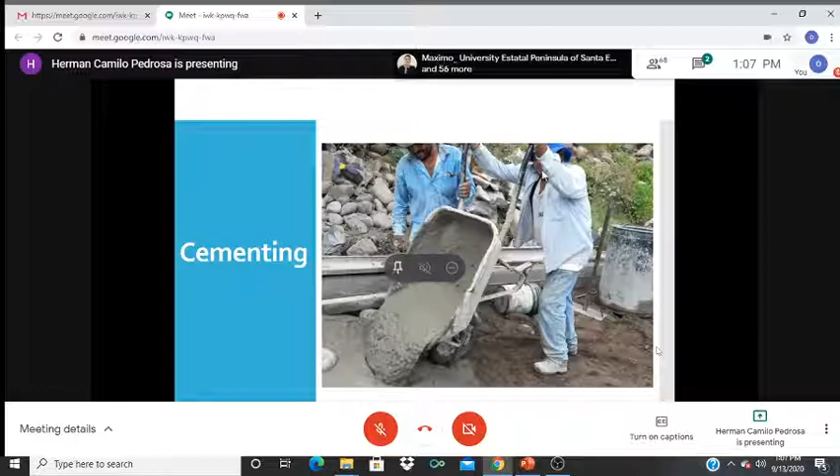But actually, that's not so far from the reality. At the beginning, oil well cementing was pretty much that - it was just a bunch of people mixing cement together and placing it on the well. At the time, the wells were a little bit shallow, so it was possible to do that.

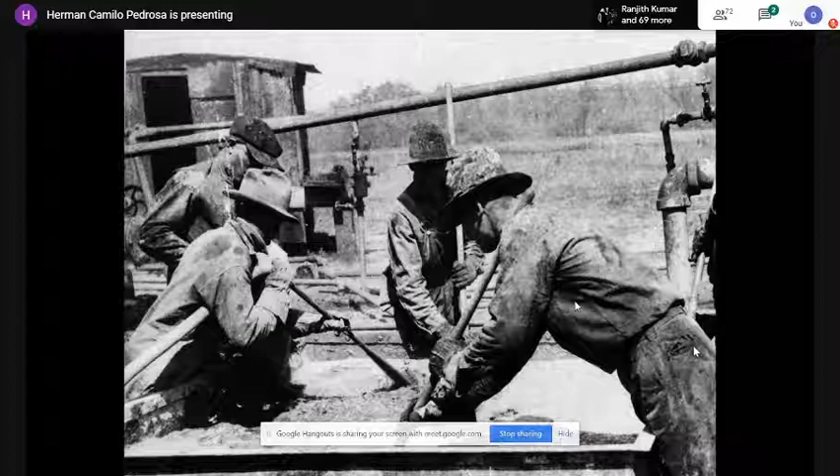But thanks to technology and more security or safety issues, we have been able to evolve a little bit. And now, from this, we only rely on something like this for our well cementing operation. So that it's more technological, automated, and has more benefits for all.

A typical cementing operation looks something like that. This is only for land rigs - offshore rigs are a little bit different, but in theory it's pretty much the same. So we'll have the rig, then we have the bulk cement or the cement silos, the water line or the water containers.

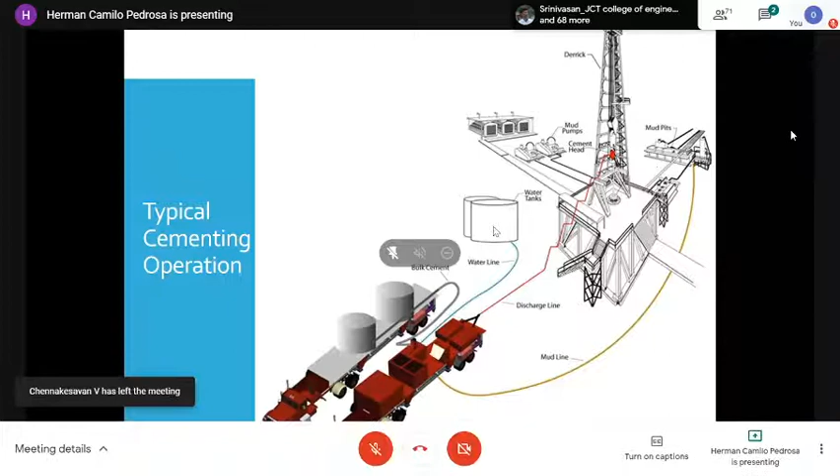These two will be connected into the unit that I showed you in the previous slide. It will be mixed, and then it will be pumped down the drill. So that's pretty much the overall picture of how a cementing operation is done.

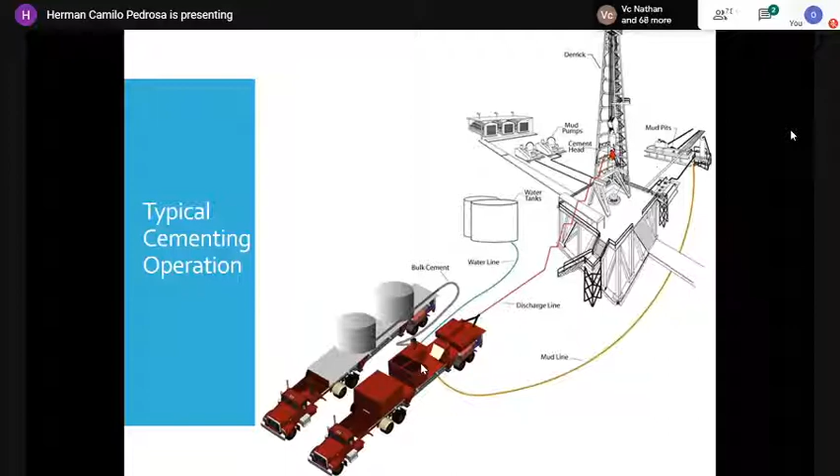But even though it sounds very easy and very simple, it has many things behind that - many things that people should care about before doing that. So in order to do this, the cementing technology and the cementing community has been evolving and creating some standards to make sure that what we do is done in the right way. The first document or procedure launched on the market was in 1937, and from there it started to evolve with many techniques and technologies.

And as I was saying, it's something that's evolving. This year the API standards for stage cementing were launched. That means as new operational procedures, new technologies, and new challenges appear, the industry needs to adapt to them. And in order to adapt in the right way, we need to create some standards.

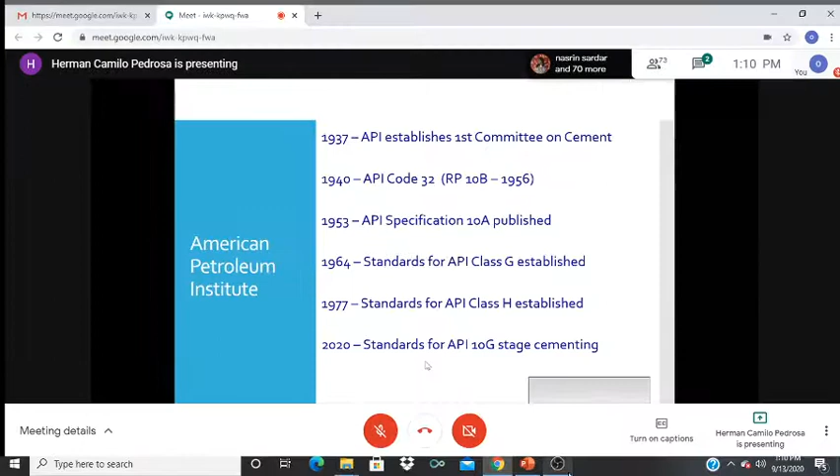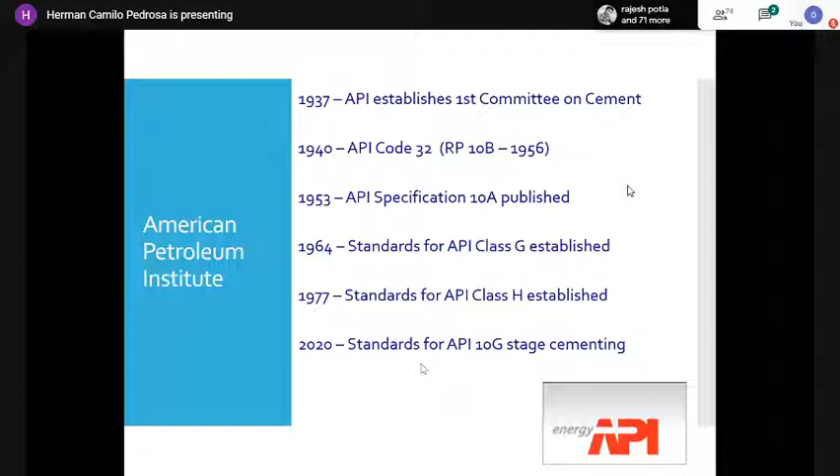That's the reason why new standards keep appearing. In between these years, there have been many more standards, but I just thought these are the most important to show you. So now I want to ask you to put on your mind -

why do you think it's important to cement an oil well?

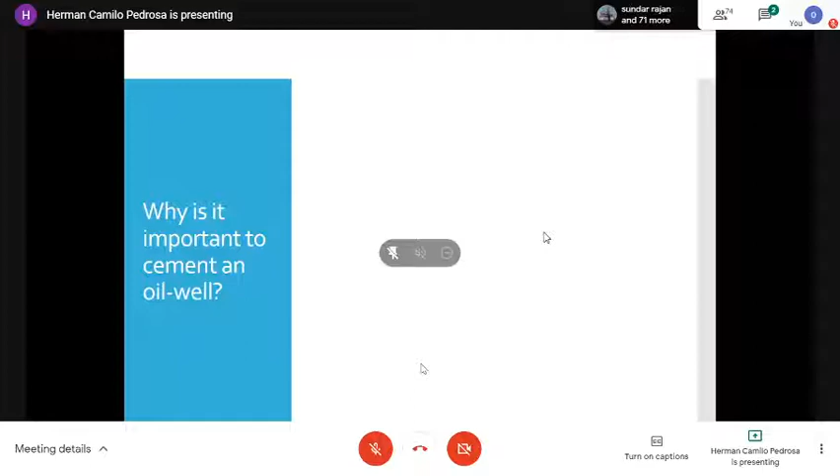There are many answers I might hear, but the main reason or objective is to get good zonal isolation. That's the main point of cementing, so you can avoid communication between zones. If you have a reservoir, it won't communicate with water reservoirs or with the surface. So the main objective of cementing is zonal isolation.

Of course there are other secondary objectives that are very important also, like hydraulic seal, working as casing support, protecting the casing, or abandoning the well. There are many other smaller objectives, but remember the main thing is zonal isolation.

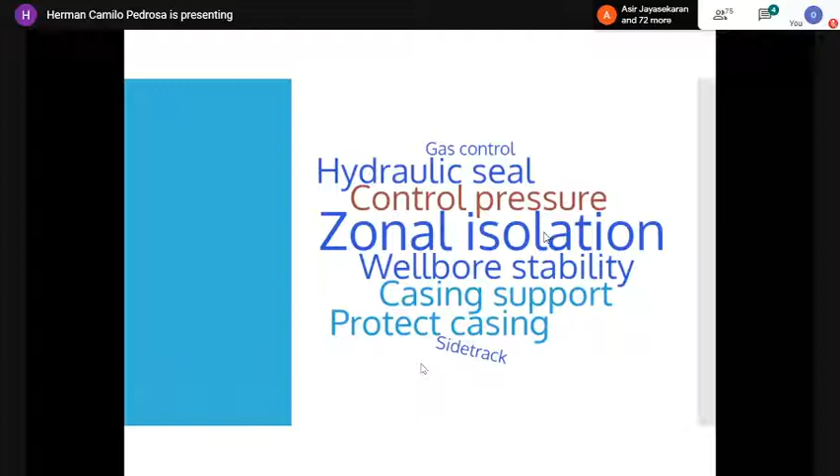The reason for that is because we don't want something like this to happen. This is an active geyser on Yellowstone Park.

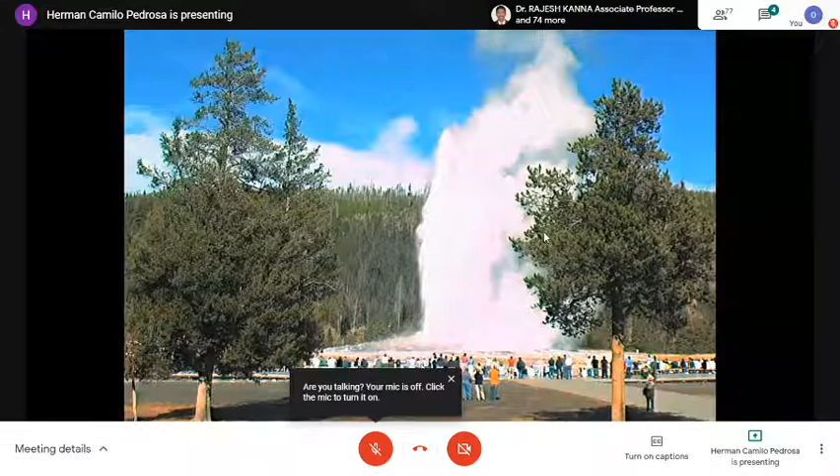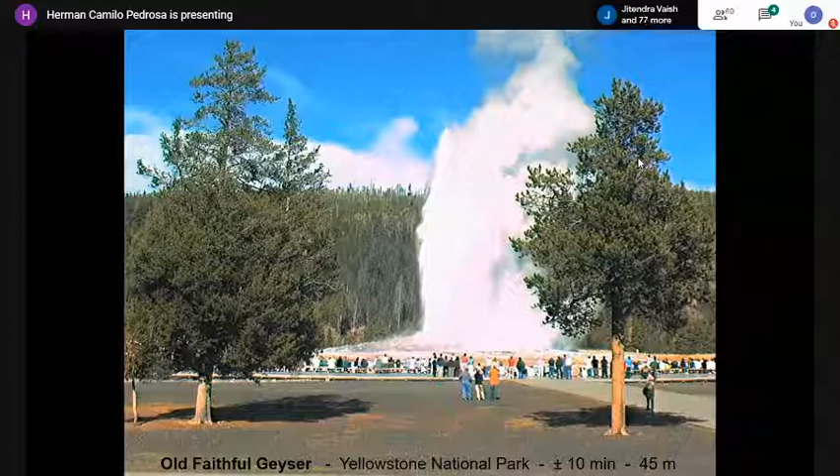There are two types of cementing. One of them is primary cementing, which is the most common type, and it has some important factors or displacement factors in order to improve the quality of the cement.

We need, for example, mud conditioning. We need to use some tools or scratchers to clean the well before or while cementing. We use some spacers and flushes to also clean the well and take out the mud.

It is also recommended to do some pipe movement if possible, like reciprocation and rotation. In some wells it's not possible, but when it is possible, it's recommended to do it.

Another factor that is very important is the flow velocity. It's always recommended to go as fast as you can, pumping the cement as fast as possible, of course without getting into the fracture area.

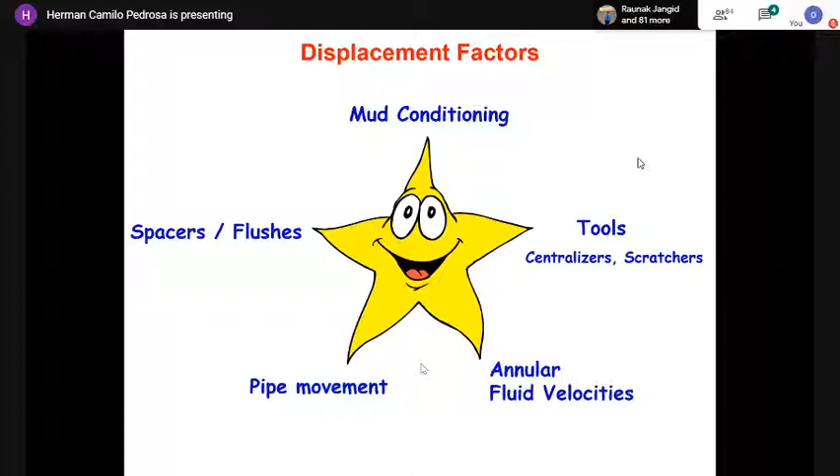Just to show you a schematic of how cementing is done, here we have a well that's full of mud, and we have been conditioning the mud. So what do I mean by conditioning the mud?

In order to clean the well of the mud, we lower some properties of the mud, like the viscosity and the yield point. Why do we need to do that? Because as we're isolating some areas, we need to remove the mud completely. If we don't do that, after it sets, the mud will dry and leave some channels. If we have channels after cementing, we'll have problems because we won't have zonal isolation - anything can flow through those channels and different areas can communicate.

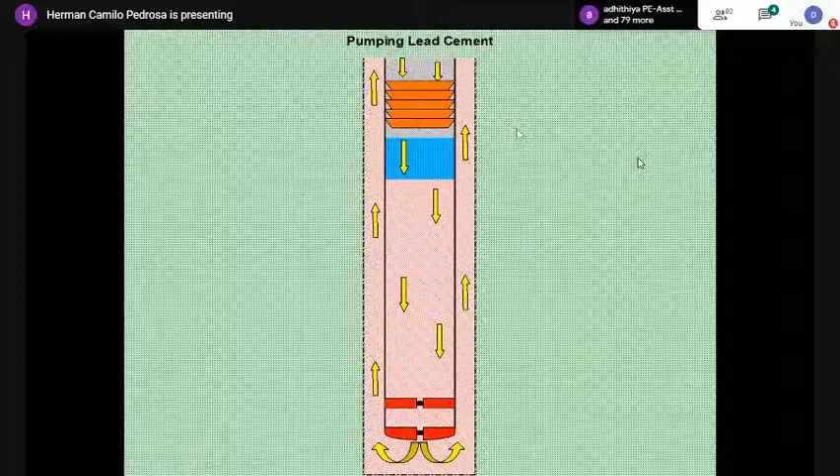So the first part is conditioning the mud. Then we start pumping the spacers and flusher, that's the blue part you can see there. Then we put some plugs - this orange one is called the bottom plug. It's very important for a primary cementing operation to have these two plugs. Actually, pretty much all cementing operations are done this way.

So we start pumping the lead cement, and it will go down, and after that we pump the tail cement. Let me explain a little bit what's the lead cement and what's the tail cement.

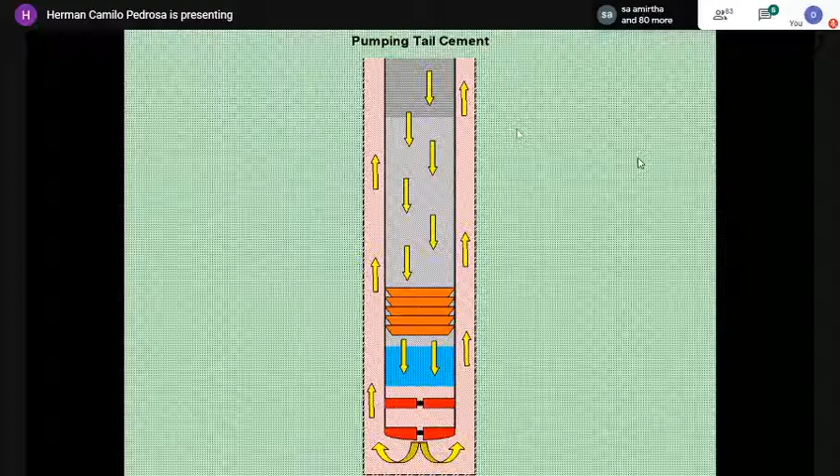The lead cement is a cement slurry with lower density and somehow lower quality. That cement is pumped first because at the end it will be on the upper side. Usually what we do is put the tail cement, which is the most important - that's the cement that has all the properties we need. But in order to fill up the wellbore higher with cement in an economical way, we use a lead cement or secondary cement that will give us some hydraulic seal, but at the same time won't be so expensive.

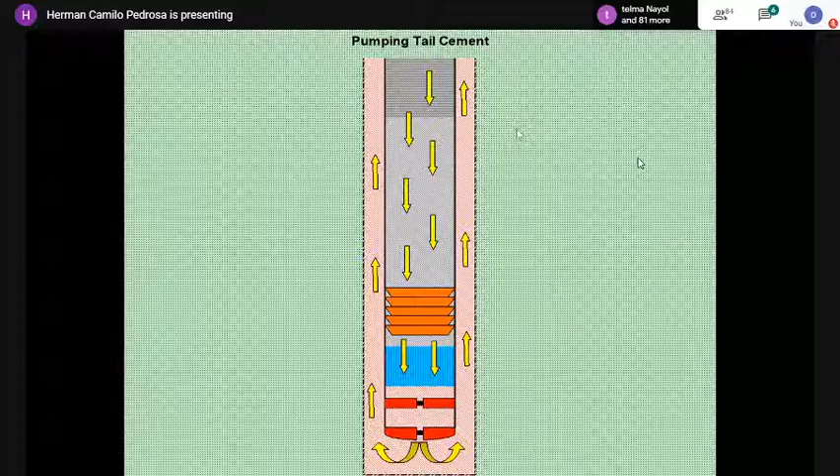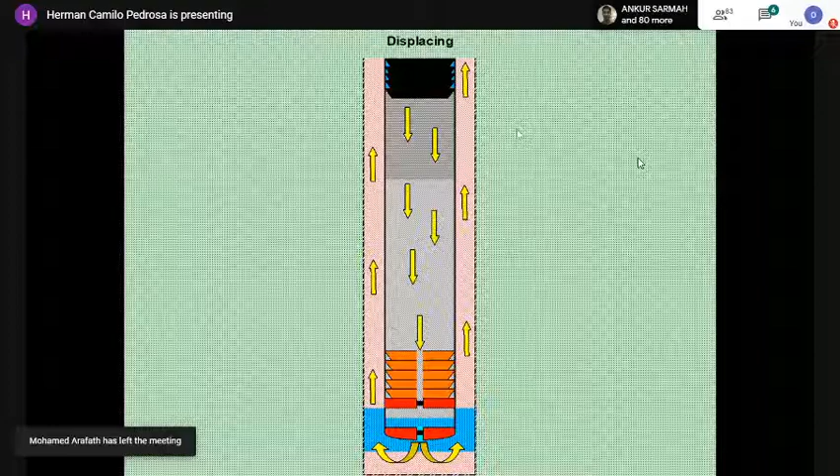So that's the reason of the lead cement. So when that happens, a plug will reach the landing collar, that is this part, and it will break. So once the bottom plug breaks, the cement can start flowing through the annulus.

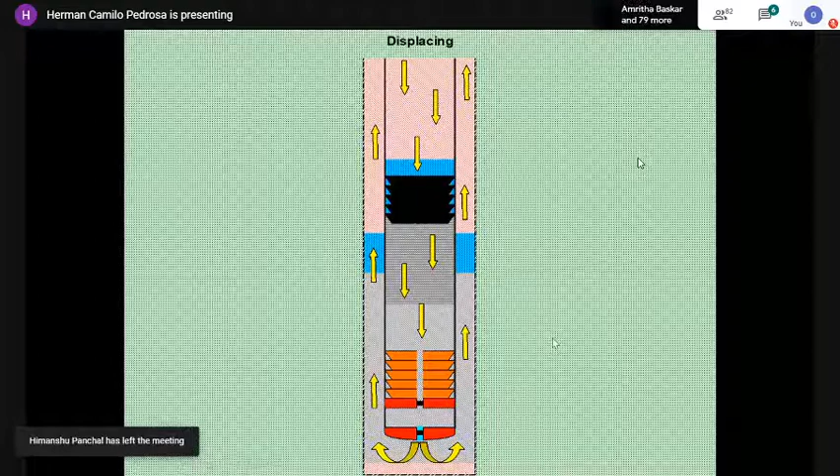It will start flowing through the annulus until this second plug, or called the top plug, reaches the first one. This plug, it won't be possible to break, so you can apply pressure here and it won't break.

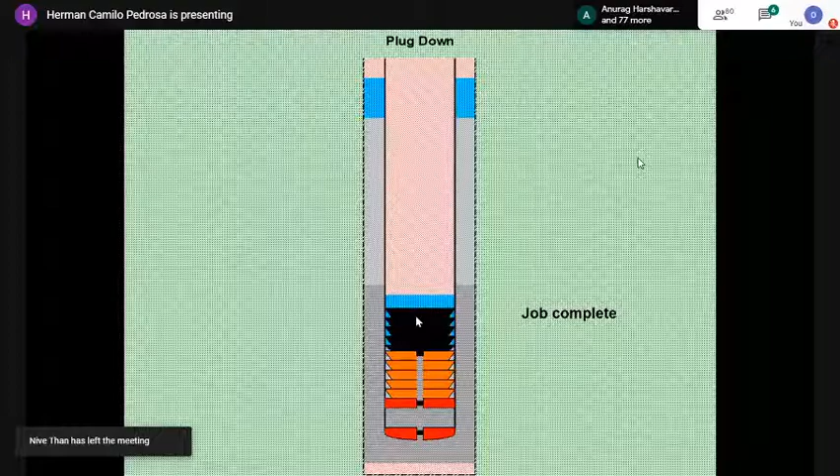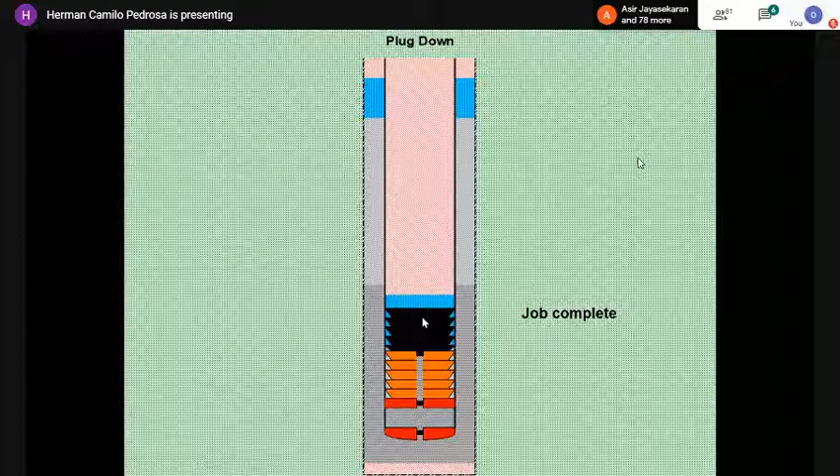In order to do that, we will use a displacement fluid. It can be water, it can be drilling fluid, it depends. And for us to know if the cementing operation was done properly, we apply some pressure here to see if we can build something like some pressure. If we cannot build pressure, that means we still are having some communication.

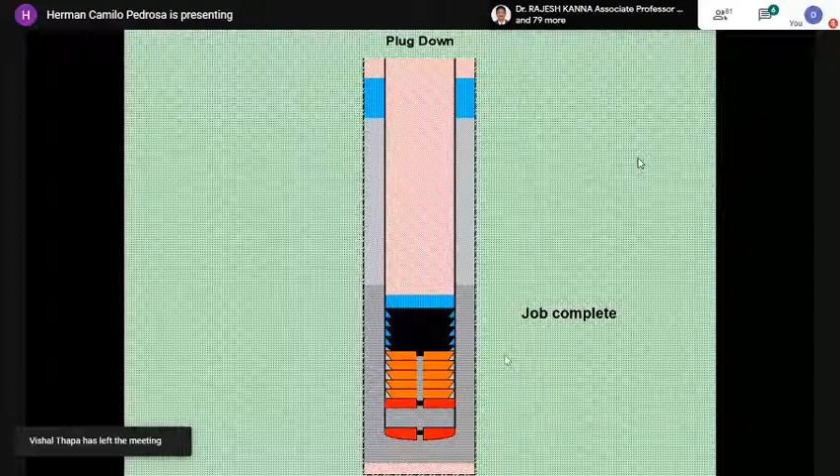So that's somehow like a quick overview of how a cementing operation is done and what happens down the well.

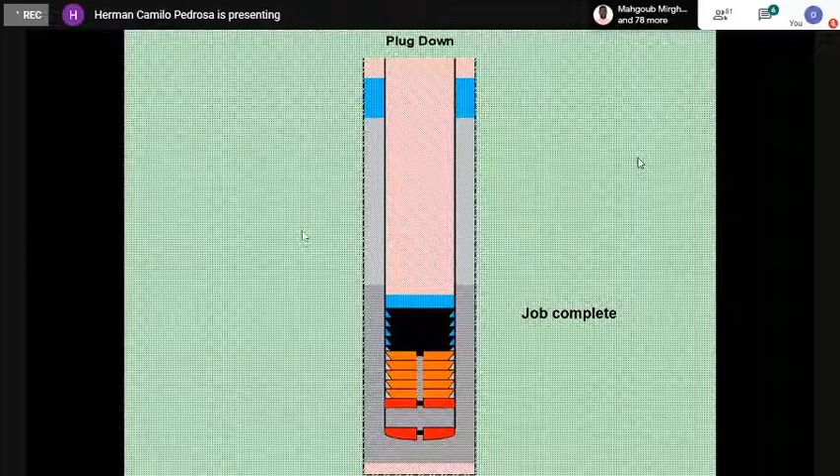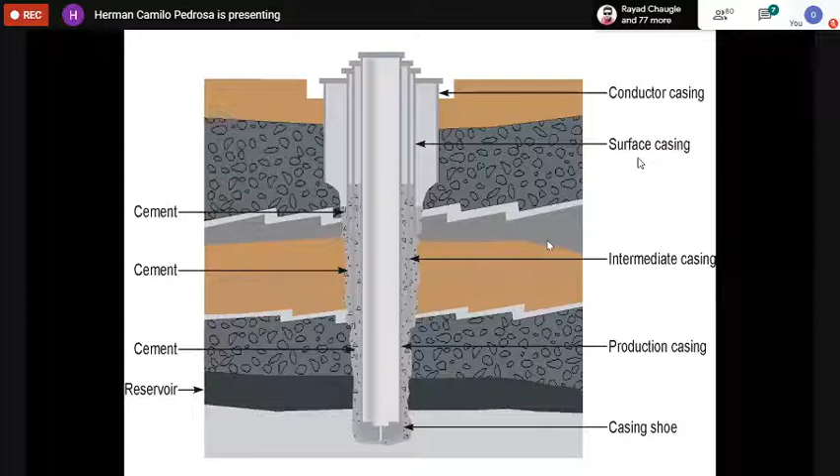As I mentioned, cement is expensive, so usually the wells are not cemented all the way up. So the engineers, the reservoir engineers and the cementing engineers, what they do is they calculate what should be the top of cement, and they cement until that point. It's useless to go above that, it's just like wasting money. Of course, some wells require that, and in those cases it has to be done, but in some others it's not necessary to go all the way up to fill the well with cement.

And the second, so I was talking here about the primary cementing. That's the cementing that will be between casing and formation after you land the casing. And then we have the secondary cementing, also called remedial cementing.

So why is this used for? Usually like to shut off unwanted water or gas, repair primary cementing jobs, abandonment of non-productive wells or abandonment of wells, seal of trouble zones that appeared during drilling, and also to isolate formation prior to perforating.

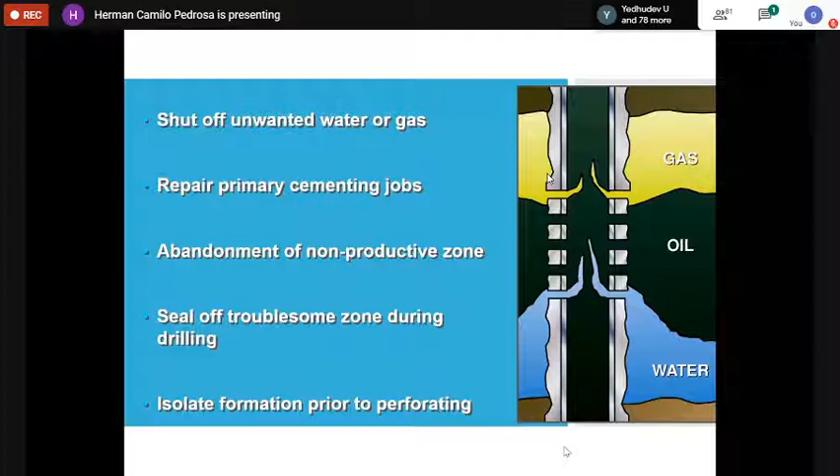That's in cases that we have a complicated formation that we need to give more stability, or to isolate from the drilling fluids. This can be done. Also to repair mud or gas channeling on primary cement jobs, as I mentioned before.

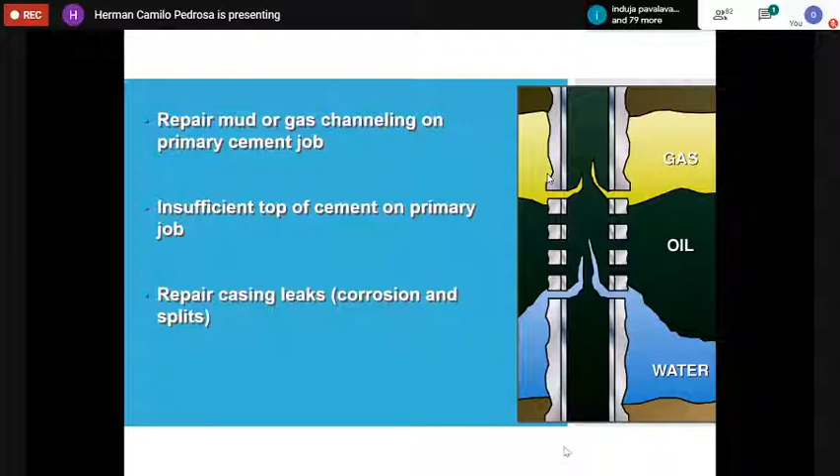If there is leftover of mud during the primary cementing, we will have some channeling, and if we have those channels, we will have communication. So then we will have to do remedial cementing. Then also insufficient top of cement on primary job, and repair casing leaks.

That was the repair cementing, but also on the secondary cementing operations, we can find cement plugs. They are also used for different reasons. It depends on the reason of the plug, the name.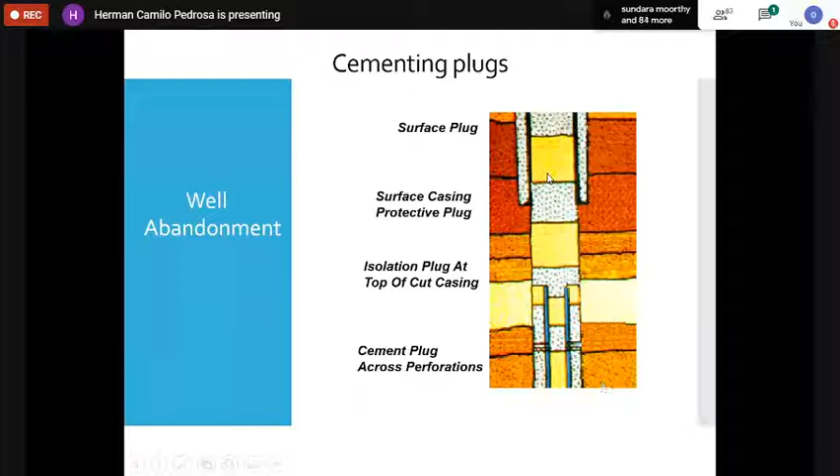As you can see here, we will have to put some cement plugs all over the wellbore to seal every single section, as I mentioned before.

Also, we have another type of cement plugs that is used to do side tracks, or to change the trajectory of the drill bit. Sometimes this is programmed on the drilling program, that you want to have a dog leg or a deviation. So what we do is put a cement slurry that is extremely hard, so when the drill reaches that point, it will be forced to bend a little bit to the side, and then it will change the trajectory.

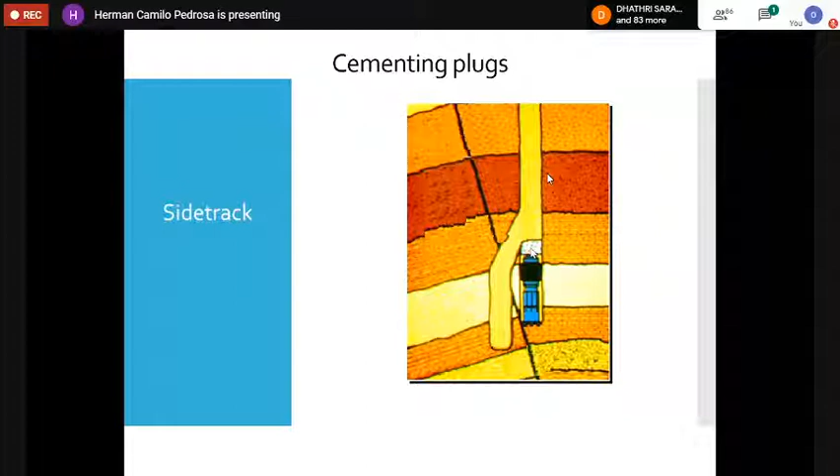Also, side tracks are used because of problems on the well. So in this image, you can see a tool. During drilling, you can have problems where you lose a tool. So what's done is a side track or cement plug is put above that, so you can deviate the trajectory and start going to another path, continuing drilling in pretty much the same direction, but from another path.

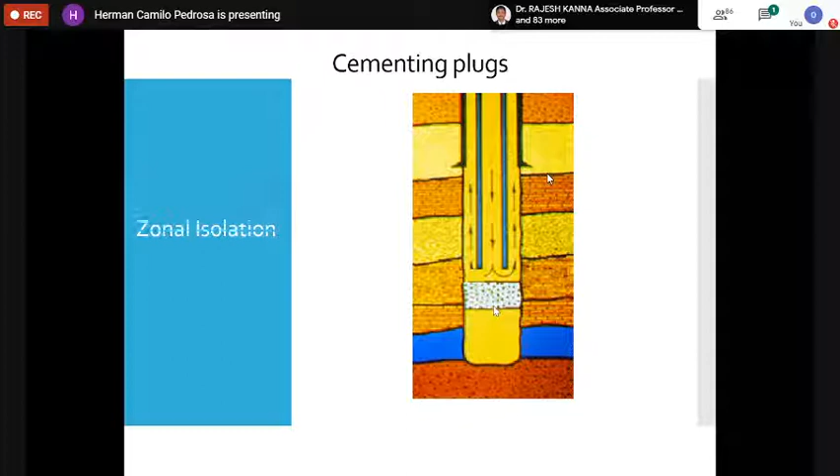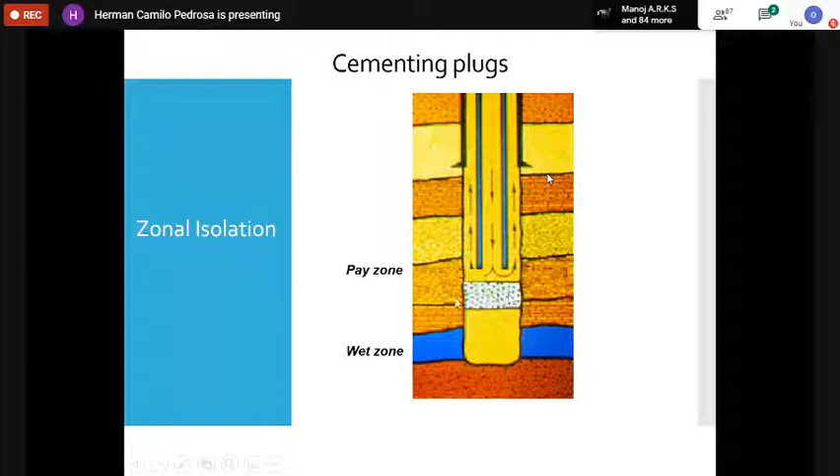This cementing is also for zonal isolation. So plugs for zonal isolation means that maybe you reach an area that you didn't want to reach. So what's done is we put a cement block a little bit above that area, so we can have like a new bottom somehow. That way we can leave undisturbed the area that we didn't want to reach. So in this case, we have a pay zone and a wet zone, and we don't want any communication between them, so we put a cement block to separate these zones.

Also, when you have lost circulation zones - a lost circulation zone is an area or part of the well that is taken away. It might be fractured, or it might be naturally problematic, and the importance of this is that it will lose a lot of drilling mud. So it's very important to control that area. What's done is to put a cement block there to avoid the drilling mud from being lost.

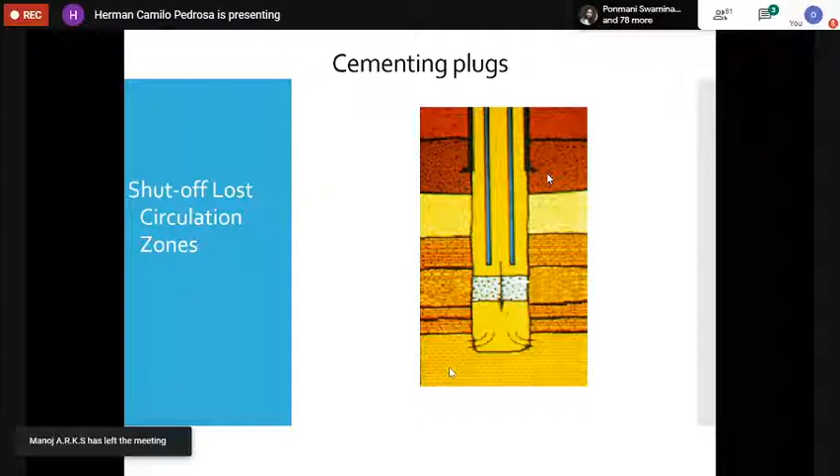So I have talked to you about pretty much the cementing operation, how it's performed on the well, and the types of cementing operations, but there is something very important, and that's the cement itself. I remember when I started working on this, some people used to say that cementing was really easy - just mix cement and water as if you were building a house or pouring concrete on a floor, and just send it to the well. And actually that's not true. It has a lot of science and a lot of important things to consider.

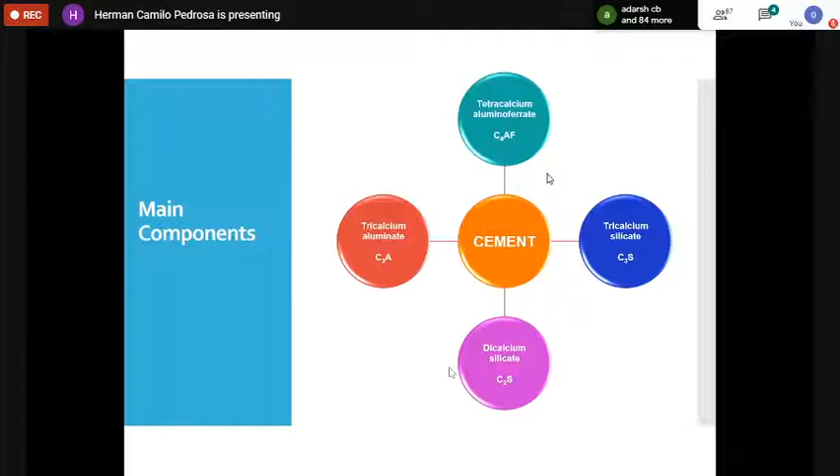So now I'm going to talk to you a little bit about what cement is. Cement comprises mainly four components: tricalcium silicate and dicalcium silicate. Those two are the ones that give the strength to the cement, giving the mechanical properties of the cement, so they are the main components. But we also have tricalcium aluminate, which is very important - it helps with the initial reaction. And we have tetracalcium aluminoferrite, which helps control the aluminate in the tricalcium aluminate.

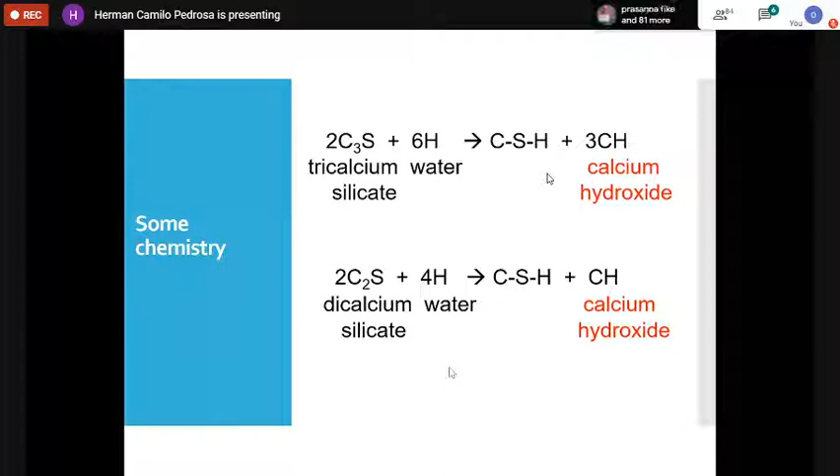I'll go a little fast through the boring part, the chemistry of cement. So mainly, as I mentioned, the tricalcium silicate and the dicalcium silicate mix with water, and then they start to create CSH, calcium silicate hydrates, and some calcium hydroxide. What gives our cement its strength is the calcium silicate hydrates. That component is the one that gives you the strength in the cement. So the more CSH you have, the stronger the cement. That's the main part.

As I mentioned before, these are like a chart of compressive strength. The calcium aluminate and calcium ferroaluminate won't give you so much strength in the cement, but what will give you strength is the dicalcium silicate and tricalcium silicate. One of them reacts faster and gives you initial strength, and the other takes longer but develops strength over time. The dicalcium silicate takes time to react. Something that happens is that cement, if it has contact with water, can continue reacting and continue building strength even after many years. That's something kind of interesting.

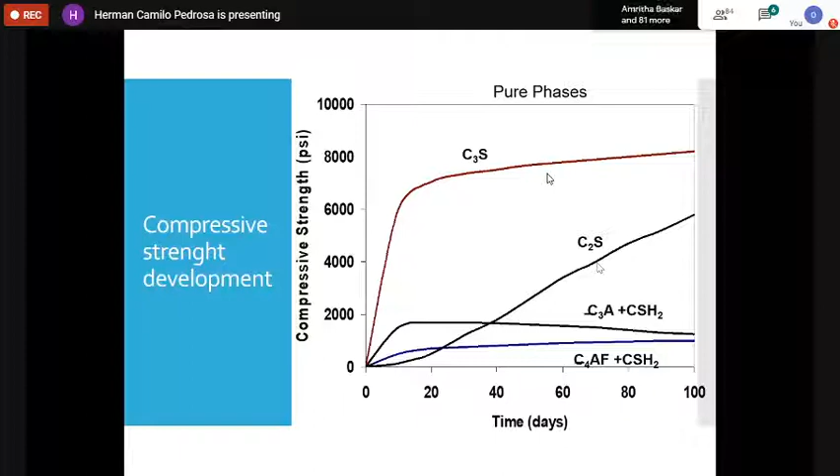And now I will talk to you a little bit about how the cement sets. I guess as many of you know, cement starts as a liquid. We mix water and the dry powder of cement, and then it starts to react and becomes a solid, let's say a solid rock.

What happens is that on stage one, we have the moment where the cement starts to react with water. It will release some heat. Then we have stage two, called the dormant or induction part, which takes a couple of hours.

I'm not going to give you the full chemistry, but pretty much what happens is that the ions will start to reaccommodate. After that happens, we have the acceleration part, and you see a bump here because it's an exothermic reaction. So when the cement starts to become CSH, it will release heat.

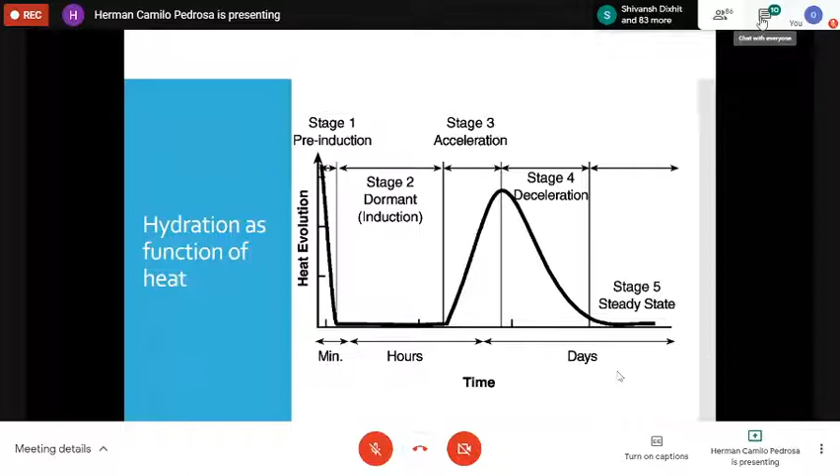Because what happens after we place the cement is that the well should be shut down so they can give time for the cement to set. Usually it can take between some hours, let's say 6 hours, to even a couple of days. It depends on many factors. But operations on the well should stop after the cement has been placed, because if they perform any other activity, the cement could set in an unwanted way, creating channeling.

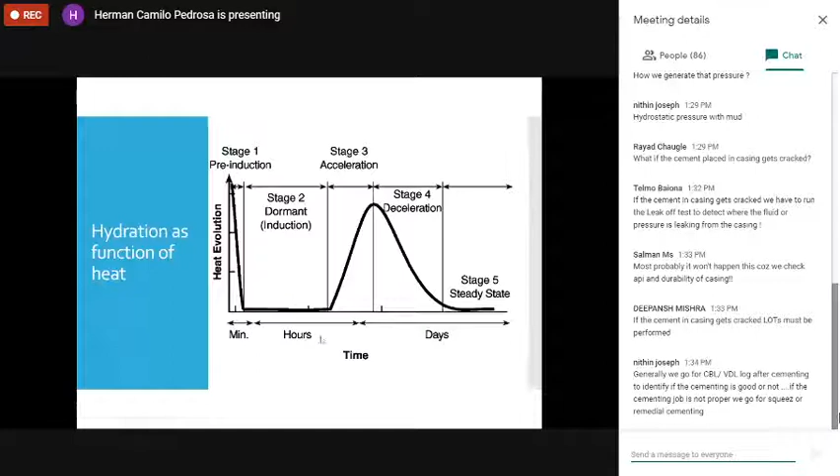Or it could set improperly. So this is the reason why these stage 2 and stage 5 times are very important to know.

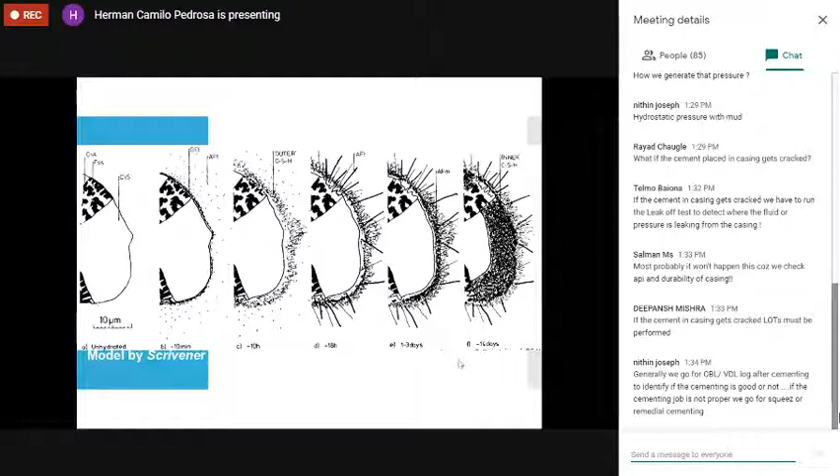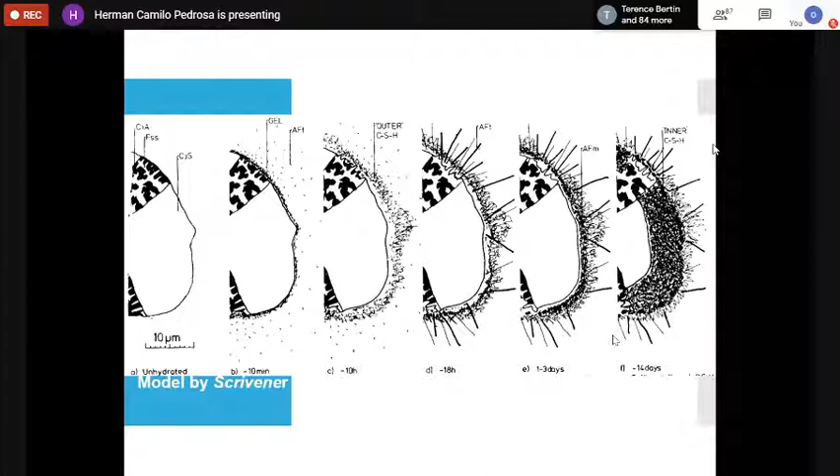This is a little bit of what happens on the cement grain. So it's a plain cement grain, and it starts reacting with the ions. It starts forming something called ettringite, and after that ettringite is created, then we get the CSH, which is this last part. But I guess this isn't very important for some of you who aren't going to work on this part.

Also, cement as it is won't fit every single well. Some wells can be cemented just with water and cement, and that's perfect. But some wells need additives in order to reach certain properties, or to acquire properties needed to fulfill or overcome a challenge.

The main additives that exist are these ones, and they are named after the challenge or the necessity that they overcome.

So we have the accelerators. Sometimes we have a cementing operation that won't take so long, for example just half an hour. If we have a cement that will set or become solid after many hours, say 10 hours, that's a problem because we'll be wasting time just waiting for that to happen. And as I'm sure you all know, an hour on the rig is very expensive, and now it's even more dangerous to just waste money waiting for something to happen. So this is the reason we use accelerators.

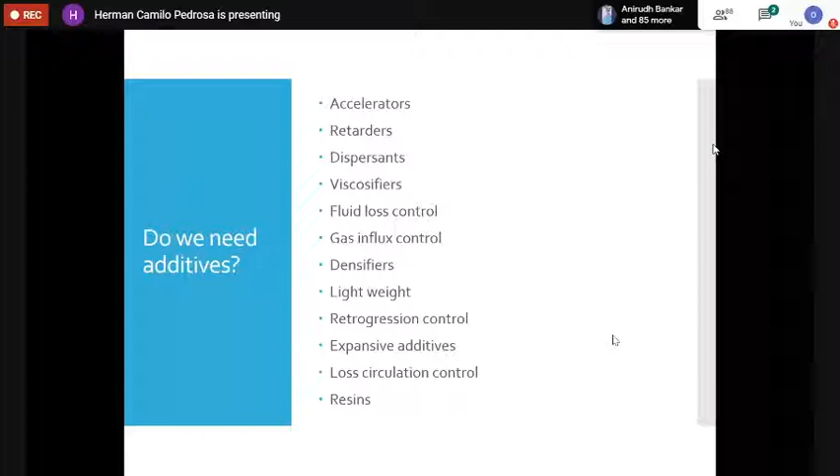Then we have the fluid loss control, gas influx control, densifiers, lightweight additives. The densifiers are to give more density to the cement, to make it higher, heavier, and the lightweight are the opposite, to make it lighter. We have many types of additives to do that, and on the lightweights there are also different techniques to do it.

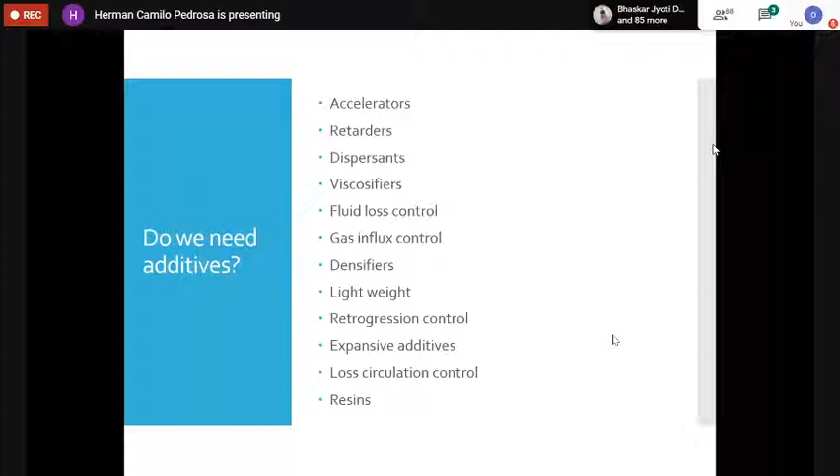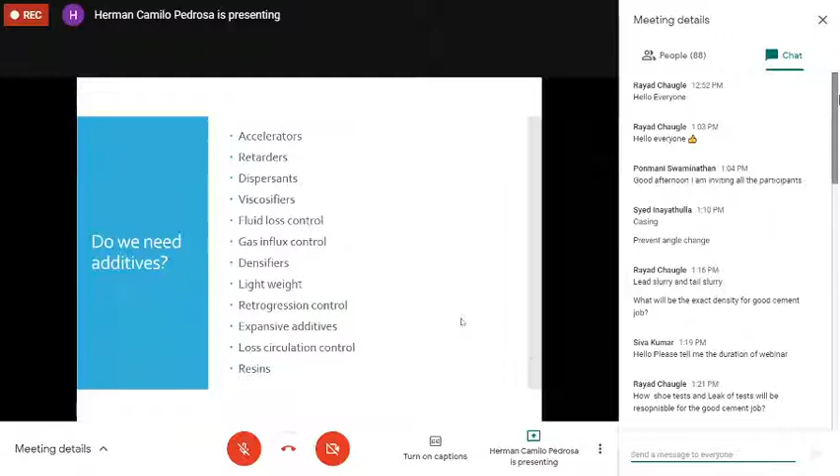Some companies do foam cement, that it's putting some foam, some air to the cement, so it will create some bubbles, so it will have a lower density, but with some really good mechanical properties. Or sometimes they only use other type of materials that will lower the density but will continue increasing the mechanical properties.

Then we have retrogression control additives, that those are very important when you're cementing a well that it's above 110 degrees Celsius, or 230 degrees Fahrenheit, because after that temperature, the chemistry in the cement will be affected, so it will start to break the CSH. So we need some additives to overcome that problem.

We also have expansive additives, loss circulation additives, and there are now some new technologies coming to the market that are the resins or composites. So instead of using cement, they are using resins because you can get much better mechanical properties, or the combination of these resins and cement.

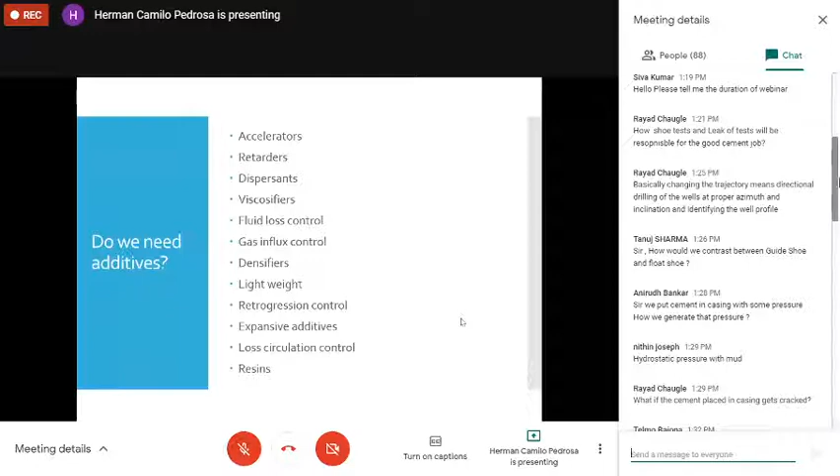These are pretty much the most important additives that they are, but there are other types. Also, there are other type of cements that, according to the operations - for example, when cementing a geothermal well, a specific type of cement should be used.

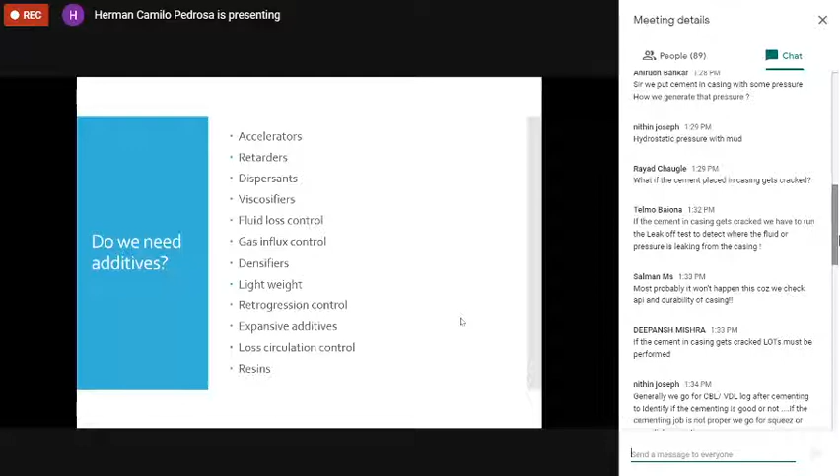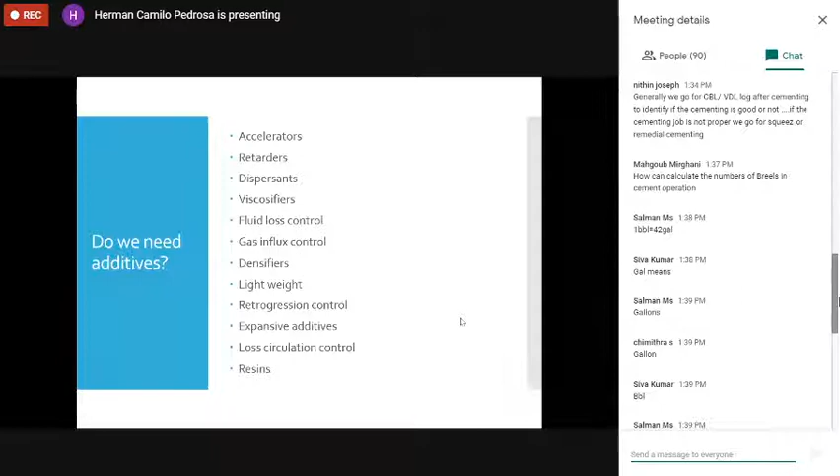Also, there are some companies that have some cements that have other kind of chemical structure, so it will give some other properties, but that's just looking into more specific challenges that are not into this case today.

And in order to know if the additives that we're using are right, the cement that we're going to place is the proper one according to our channel, according to our challenges, according to our conditions, according to the well, it's very important to test the cement, to do all of the tests, so you can not be sure, but at least so you can control many parameters on your cementing operations.

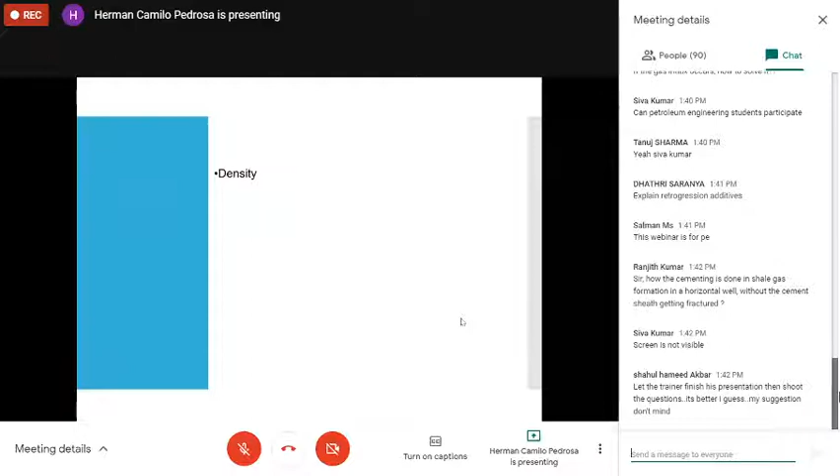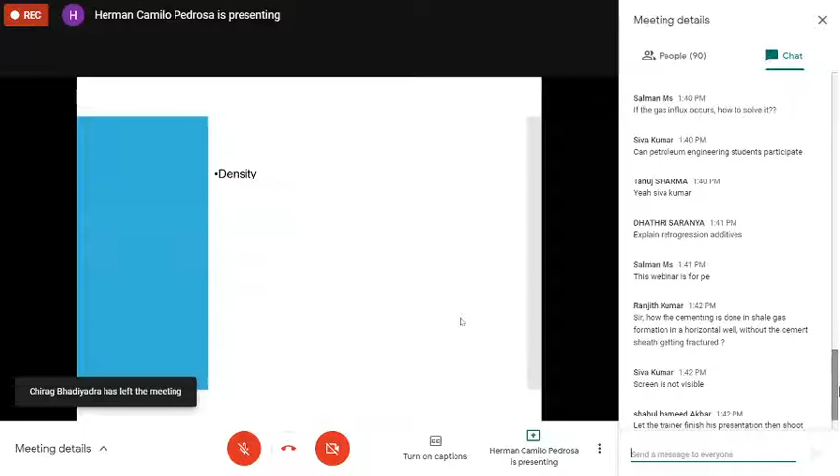So the things that we control usually are the density of the cement. Why is it important? It's very important because on the calculation that has been done, usually you have like a small operational window on pressure or ECD. So if your density is heavier than your operational window, what happens is that you may fracture the formation.

But then if your density is very low, what can happen is that you can have gas influx because you don't have enough hydrostatic pressure to control it. So that's very important, and we do it just like with a regular mud balance that I guess many of you know.

Also, what we control is free fluid. The free fluid is just like the water that's there if the cement has sedimented and we have some water on top. If we are cementing a vertical well, that can be an issue, but the problem is that the top of cement won't be as high as we want to, and it maybe won't be so problematic.

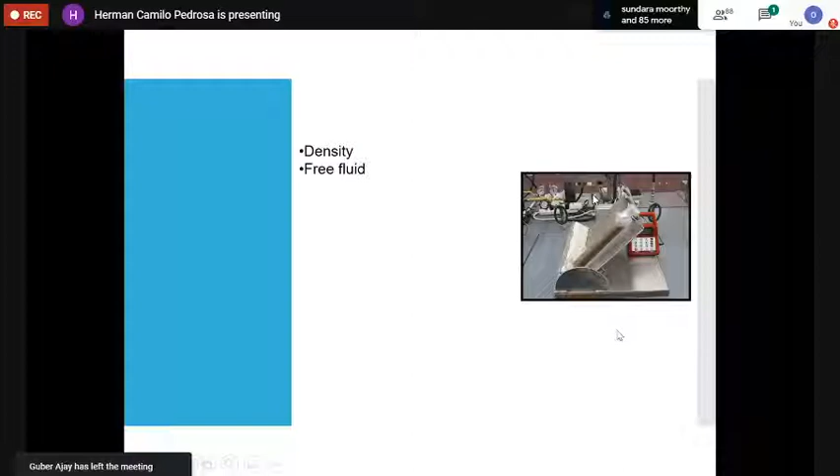Usually, the accepted water is 0%. So it should not be any water on top of the cement.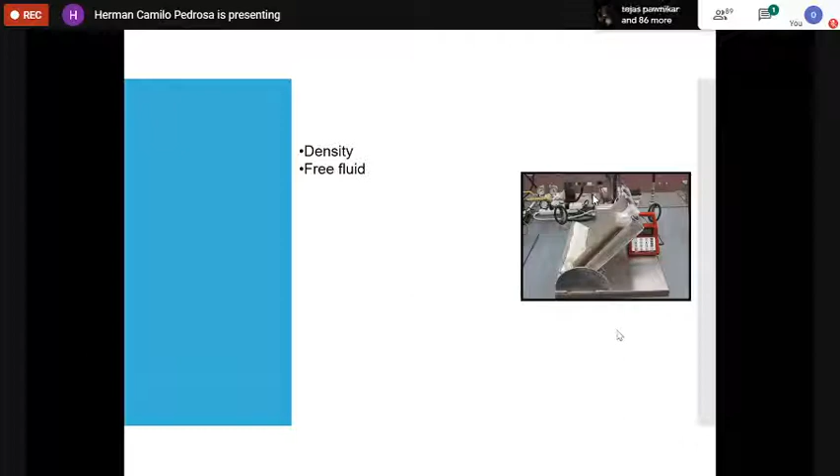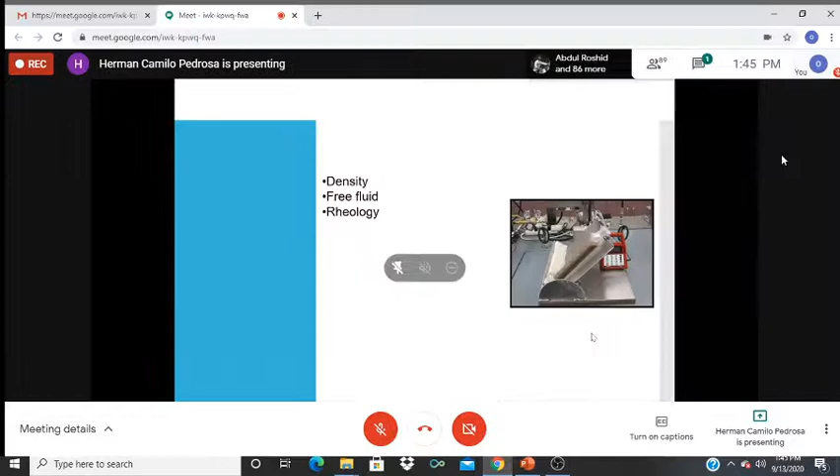Then we have the rheology. So the rheology will help us to know what's the viscosity of cement. As I mentioned before, the ECD is something that is really important for us. If we have a high ECD, we can damage the formation. And a way to increase that ECD is with higher viscosities, so if we have a really high viscosity on the cement, we may have that kind of problem.

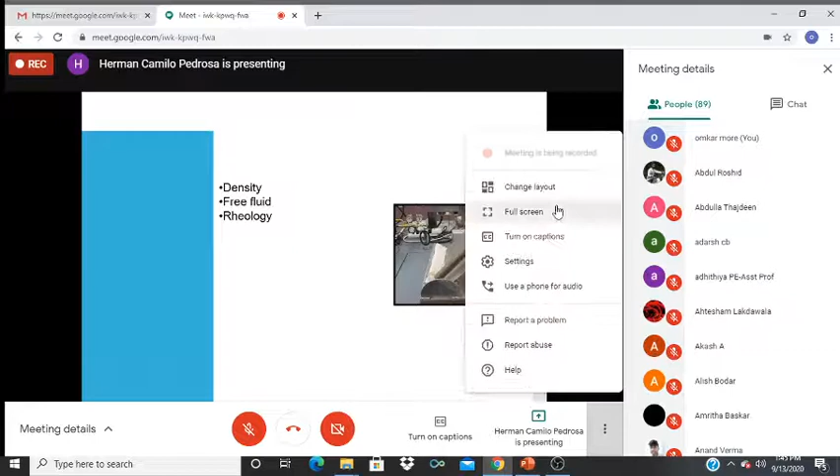Some people will say, just use a lower viscosity. But the problem with lower viscosity is that if we have a mud that is viscous, we won't be able to displace it. An example of this: if you have honey, which is a viscous liquid, and you're trying to displace it with water, the honey will stay and the water will just go around it.

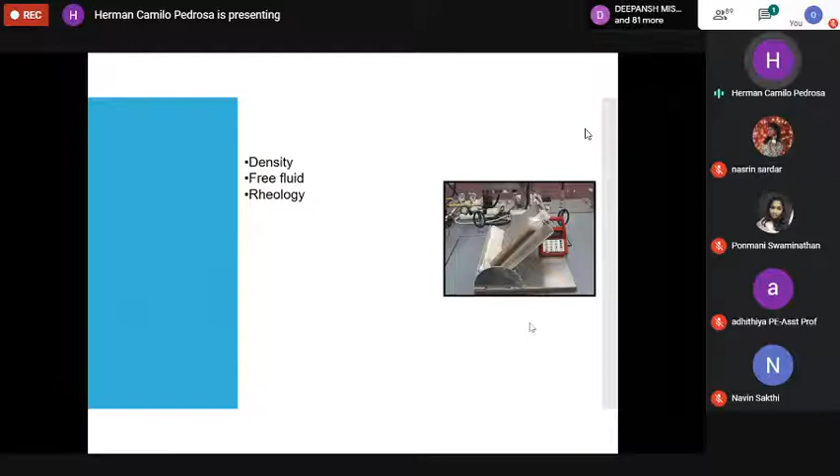So what we need is the opposite: to have a fluid, and a cement that has a higher viscosity. It's like if you have water and then you're displacing that water with honey. The honey will displace the water completely.

The way to measure this is by using the viscometer model 35. You will find this in every cementing lab, and also many mud labs. It's a very easy technique to check.

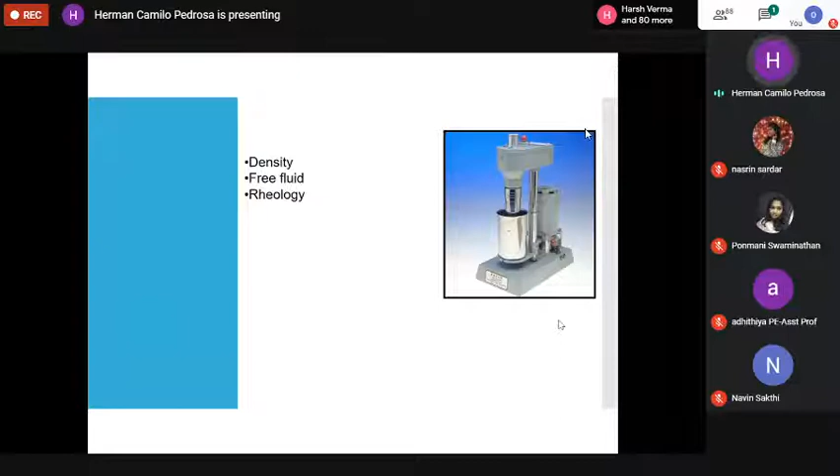Also, fluid loss control. The importance of this is that the cement doesn't lose its water, because as I showed earlier in the reaction part, what gives strength to the cement is the reaction of the dry cement powder with the water. If we lose that water, we won't get the strength we need, and we also won't get the height of cement that we want.

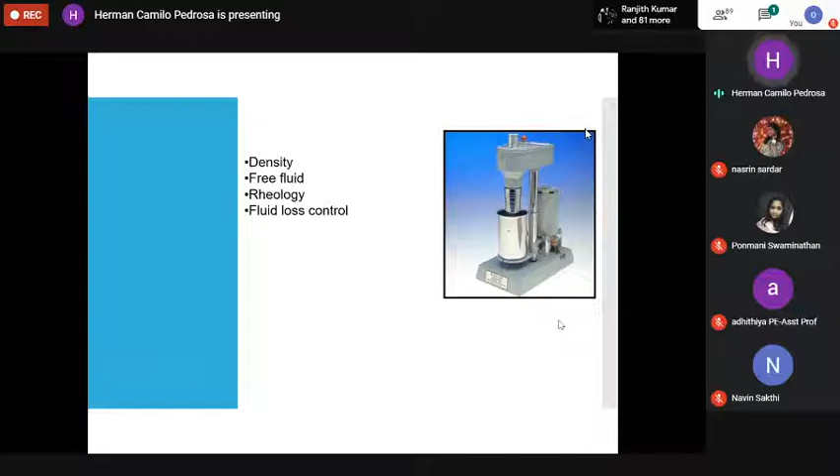A way to explain fluid loss control: if you go to a river or the sea and get some sand in your hands, you'll see the water comes out of your hand, and you're left with a paste of sand or earth that you can move, but it's very breakable and doesn't have any mechanical properties. That will also happen to cement, so it's very important to control.

The apparatus we use to check this property is the fluid loss press. We apply some pressure on the cement and see how much water it releases.

Also, we have the thickening time. Some people call it the queen of the testing. It's one of the most important things, because it gives you the time you have to do your operation, your cementing.

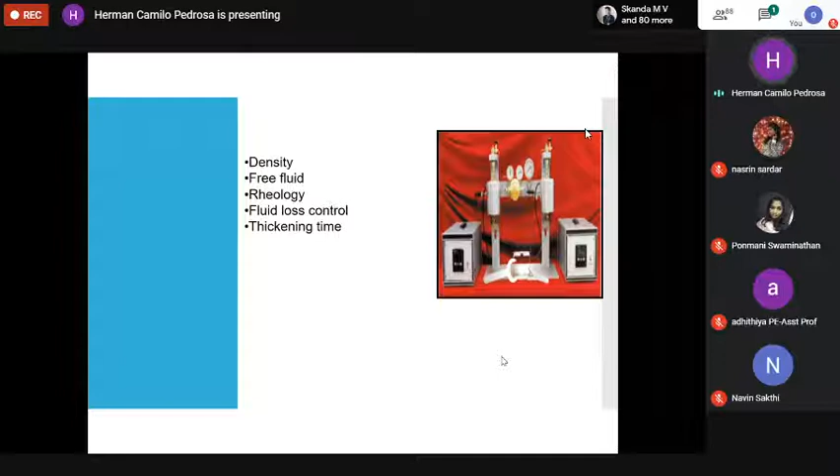What we use is a consistometer. On this equipment, we simulate the pressure, the temperature, and the movement that the cement will have, and we check the time. So what we see is how much time it takes for the cement to change from being a fluid to becoming a solid that's not pumpable anymore. It's very important to know that in order to finish your cement job properly.

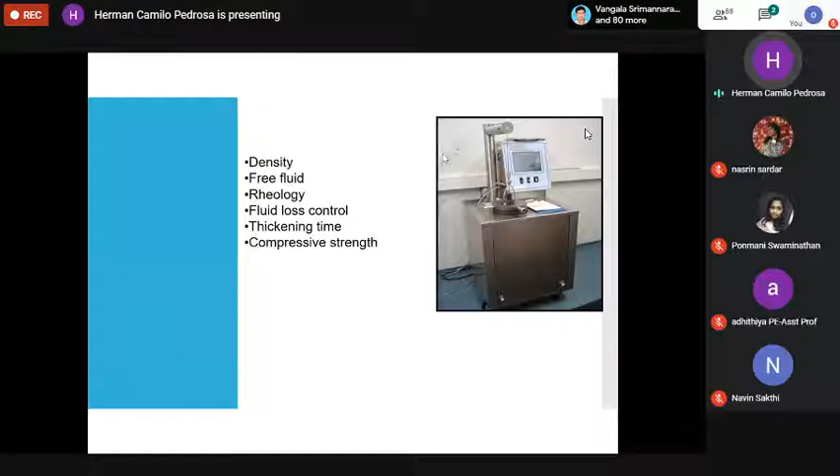Then we have compressive strength, the property that gives you the strength of the set cement. There are two ways to measure it. One is the destructive way: you put a cement set and break it with a press, then you know the maximum load it can resist. But the problem is that it's only valid at one point in time. For example, if you set a cement for 8 hours and break it, you know the strength at 8 hours, but that strength will be different at 12, 13, or 24 hours.

So now the industry uses ultrasonic cement analyzers. Just by looking at the wave velocities, it checks how the cement is reacting, how it's changing from liquid to solid, and from solid to getting harder and harder.

This is very important to know at what time they're able to start conducting other operations on the rig. For example, after the cement has reached 100 psi of strength, they can start doing some small operations. But when cement has reached 500 psi, they can do more important operations, like releasing casings.

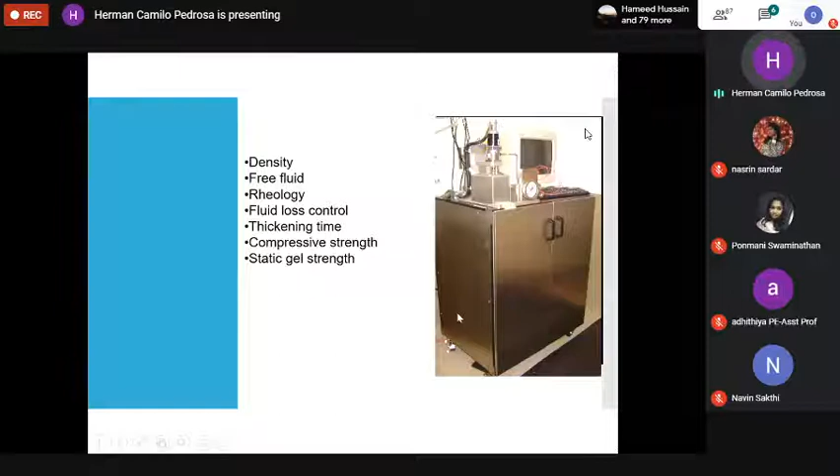Another important parameter is the static gel strength. It helps a lot because when cement changes from liquid to solid, there are a few minutes where it's like a gel. So it won't control gas influx by hydrostatic pressure, because it's no longer a liquid. And it also won't control gas influx as a solid, because it's not yet solid. So it's very important to know this time, so you can see if you can have any gas influx or not. We check that using a static gel apparatus. There are several types, and this is one of them.

We also check the mechanical properties. One of them is the elastic modulus, which tells you the elasticity of the cement. I know it sounds weird because cement is like a rock, so it's hard, not elastic. When you hear elastic, you imagine rubber. But any type of material has some elasticity, including cement. This elasticity is important because if you have loads or cycles on the well, the cement will reaccommodate itself somehow in order not to break, but to overcome those cycles. So it's very important to know the elastic modulus of the cement.

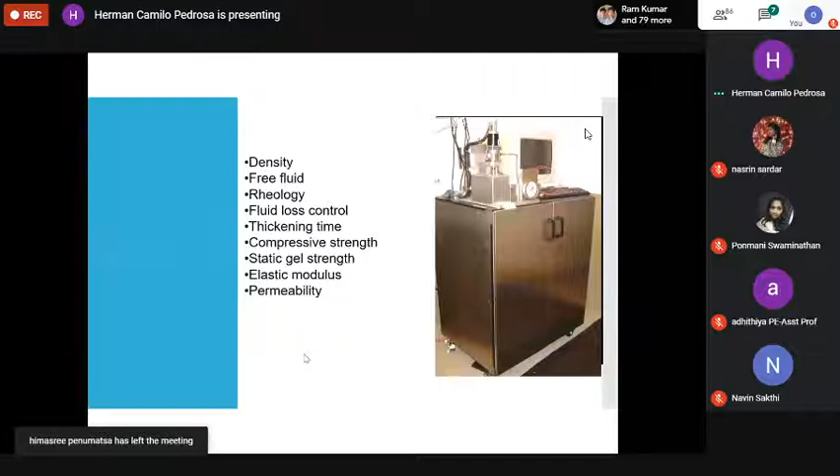Then we have the permeability, which tells you whether you can have any communication, and for that a permeameter is used.

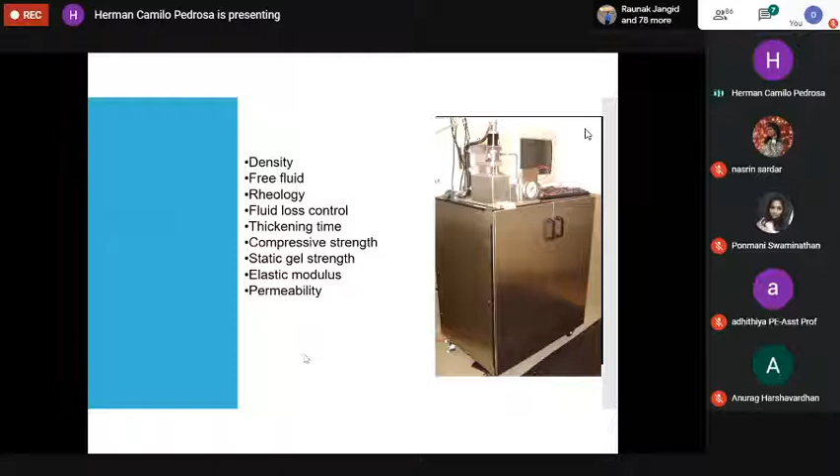That's pretty much all the information I wanted to share with you. I hope you liked it, and I hope you got to understand a little bit of what cementing is, its importance, and the challenges and science behind it. So if you have any questions, please let me know.